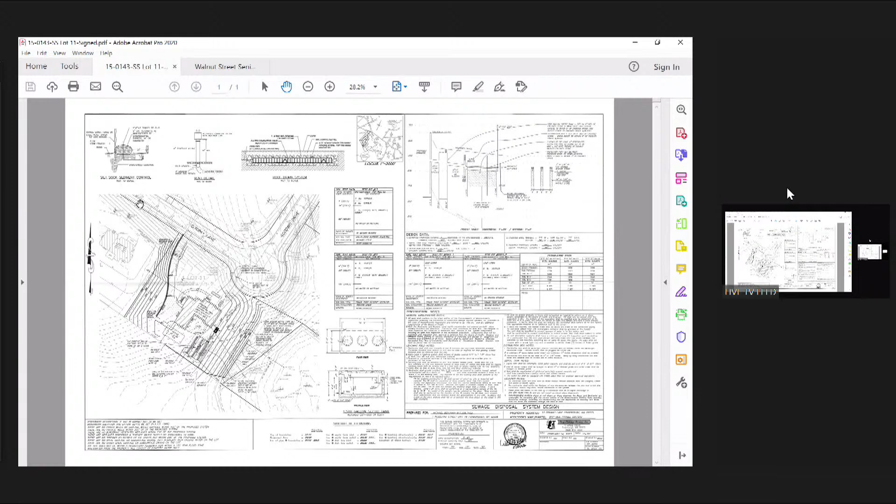So I've put the plan up on the board. I know every one of you has a copy of the drawing, and I'll just give you a quick orientation. So this lot is located on Conway Lane, so if you were coming up the completed portion of the site, went to the top of the hill and down the hill, this is at the bottom of the hill at the cul-de-sac. And this is Goodwin Drive, which has been completed for about 600 feet or so. So here's Conway coming from the top of the hill, here's the cul-de-sac, and here's Goodwin Drive.

This was part of the Lawson Farm subdivision that was reviewed back in 2016, and the future owner proposes to construct a single-family home on the lot. A portion of the lot lies within a 100-foot buffer zone, and I'm going to have a problem, I'm pretty sure. Oh, here we go, good.

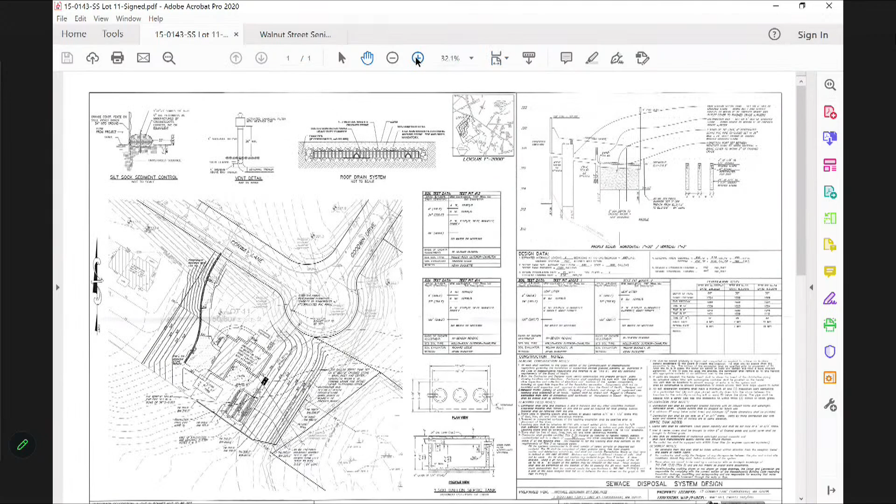Let me zoom in here. I should have colored this up better, but here's the 100-foot buffer zone line right here, so you can see that.

The only work taking place is some grading down here and a portion of a wall, which is up to 6 feet at its highest point. It's basically just holding back the slope in order to eliminate any more grading within the buffer zone. There's already some erosion control fencing down there.

It'll be expanded for this project. At its closest point, the wall is about 88 feet, or the limit of clearing, the limit of work will be about 88 feet from the BVW, down in this area. It's about a total of 1,275 square feet of alteration.

All of it will consist of the landscaping, which is the wall. At this point, I think what we're going to be using is a riprap stone slope there, because they've already started building that, and they plan to continue using it.

As we've talked about previously, this is a path that comes in from Lakeview Road, and it will run through the land that's going to be conveyed to the Conservation Commission eventually. This lot itself has two fence posts that will be placed, one here and one here, where the path is closest to the property.

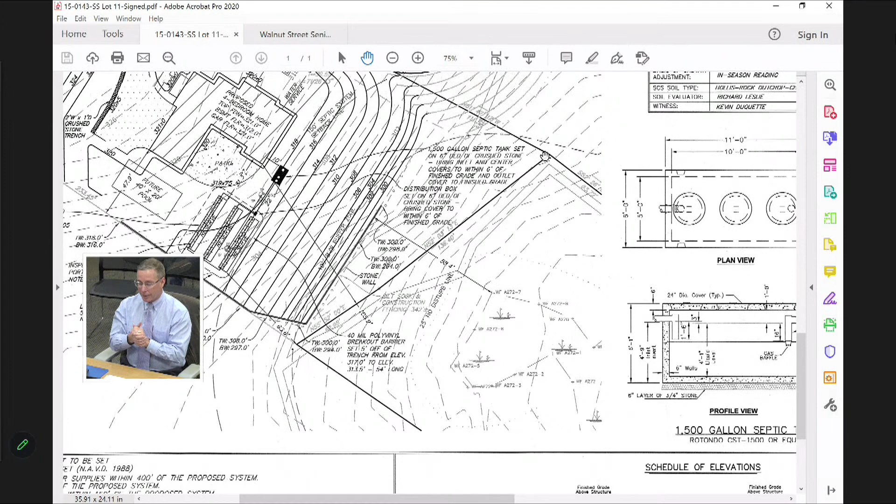Those posts are 6x6 posts. They'll stick about 4 feet out of the ground and have a tag saying conservation property. This was approved during the initial design—it isn't part of this design, but I wanted to show you where it lies. The septic system is more than 150 feet away from any of the wetlands, which is in compliance with the Board of Health regulations and the local Conservation Commission bylaw.

At its closest point, the house is about 165 feet from the BVW. I think this would be an appropriate one for a request for determination because of the very limited amount of work taking place within the buffer zone, and because at its closest point we're about 88 feet away from the closest wetland resource area. That concludes my presentation.

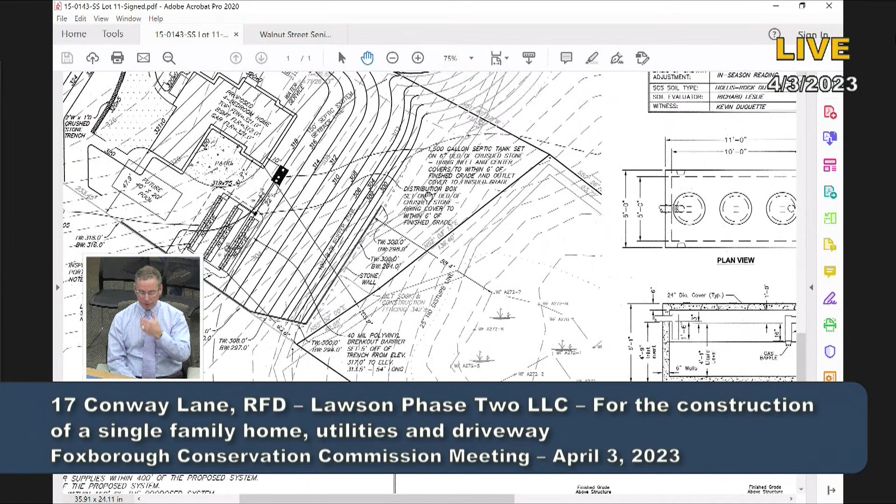Okay, I know Jane has some questions on it, but any questions from the board?

Where's the riprap gonna go? What we were going to do—what they've done now is they have so much stone up there. When they were clearing this lot, they already started building that slope and used riprap on it. So we'll probably continue to use riprap on it, as opposed to taking that all out and putting in grass. So that's gonna be that entire slope—well, I wouldn't say the entire slope, but a decent amount of it, yes.

Probably not near the top, because Joe Homeowner wants some lawn—he's not gonna be interested in looking at that. But down below, I think, would be the area where it would remain. It's gonna be a steep lawn. Yeah, that's a tough area.

This was the house, though—he wanted a flat backyard on the side of the hill. Good for sledding.

When you actually walk that now, the construction fence is up and the silt tubes are in, but are they in the buffer zone? Because based on your plan here and walking it, it appears that they've already done this work.

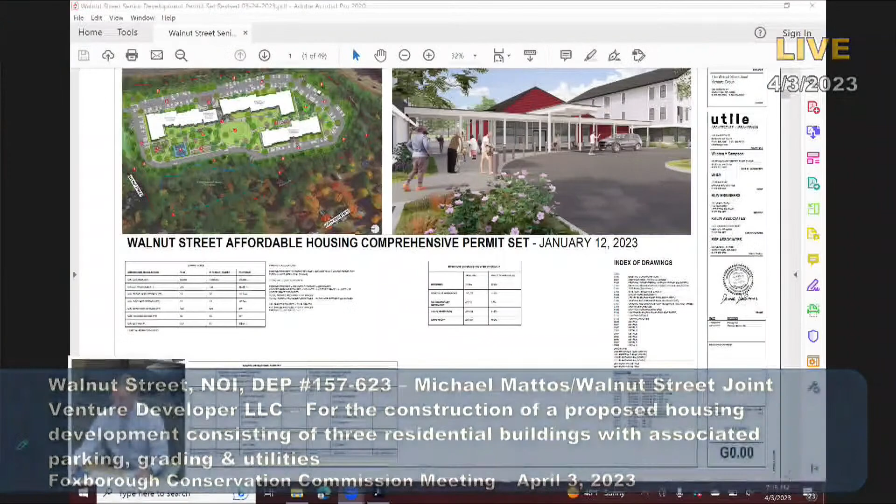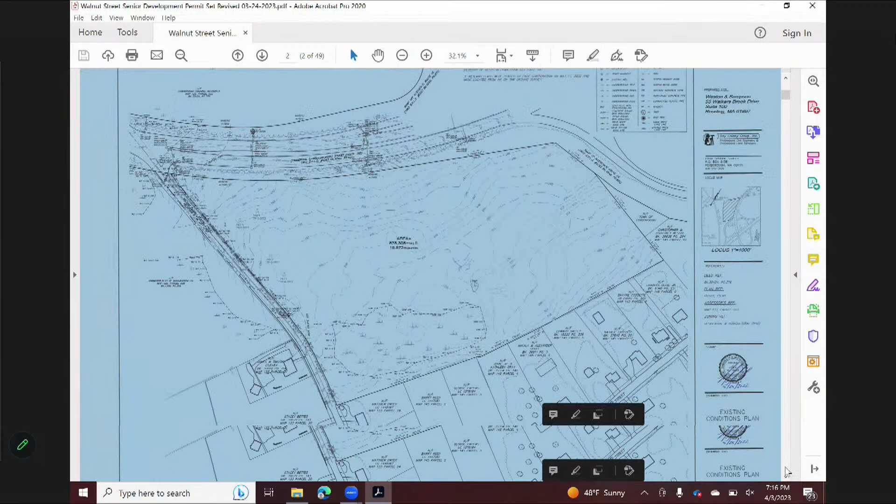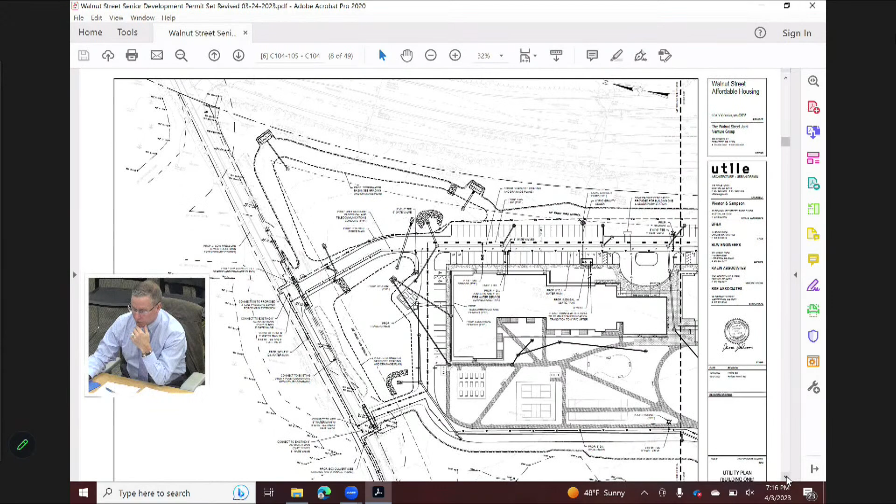And as we stated before, the fact is that wetland is actually above us, it's flowing toward us. So that was one of the things. If you go back to sheet C106, that's your stormwater sheet.

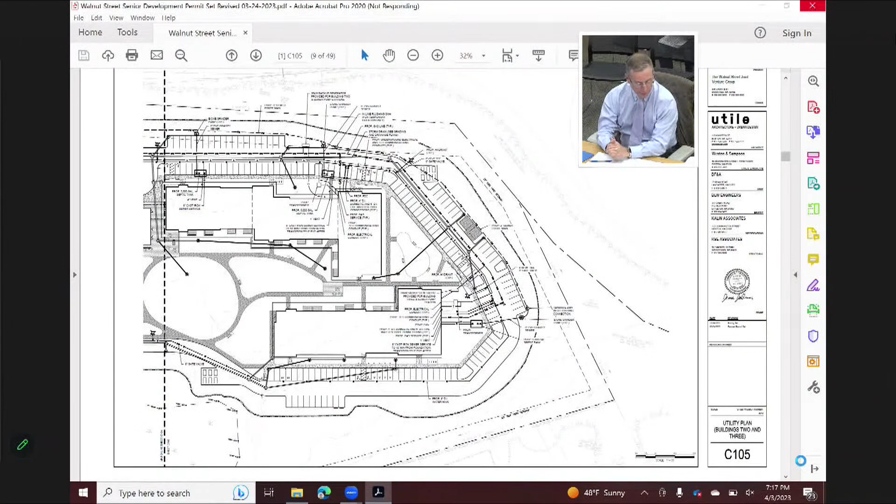That shows where Jesse talked about at the last meeting, the fact that the water department asked us to connect the water lines between the two driveways. So, well, not just connected, we're replacing the existing line.

So if you look on that plan set, on Walnut Street, you can see that we've added, if you look between the two driveways, you'll see the line on the other side of the street, which shows how the new water line would be laid. And again, that's all within the pavement.

And then finally, on the same sheet, I'm sorry, that was C104, but you can still see it on 105. But if you look on 104, and then go back to 105, on our side of the road, there's a big ditch, if anybody's been out there.

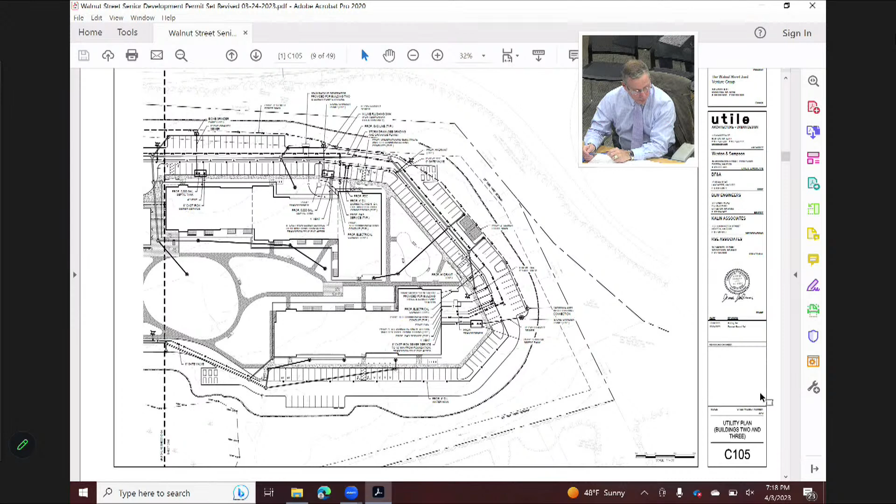And what we initially showed was piping through there. Going back and looking at it, it's not going to really handle it. So what we're proposing is we replace the piping with a box culvert, so it's a 3-foot span, 1-foot rise, and it's under both entrances. The emergency entrance, which is more toward North High Street, and the main entrance, which is closer to 140. Again, that's all on our side of the street, but some of it is within the buffer zone.

So those were the changes that were made. And we'll open any questions.

Jane, I know you did a site visit. I did, and I went right at the height of vernal pool season. I'm pleased to announce there were no chorusing wood frogs, and there was very little water, actually.

I don't understand what you mean all the water goes down towards the front, because it looked pretty darn flat to me right there. But besides that, the particular area where they're going to get it closer, it was a conservative delineation, so I don't think it's going to make a significant difference. But I would like you all to make a finding about that before it's closed.

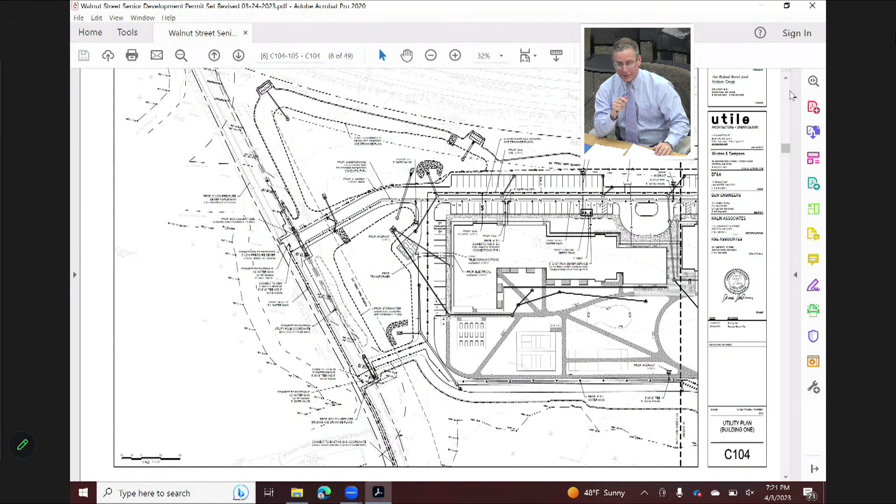And that's on sheet C500. If you take a look, the lower right corner - it's not a hay bale, this thing's listed as a compost filter tube. That information is usually included in an attachment, attachment A, with details like that.

All right, any other questions? Because of our experience in the past, he just said that they're gonna put the fencing up and the filter tubes, but usually you mark it out with flagging and then they clear it because it's so hard to move those tubes. So who's right? Well, isn't construction fencing first, probably tubes after it's been cleared?

Typically, what I write, and I'm sure it's the same thing you just said, Mr. Packer, is the surveyors would mark it out, you go in and clear the trees. Not necessarily, we don't stump it at that point. Then we go back in and put the erosion control fencing in, because now we can move around, and then we stump it. So the only disturbance you'll see is with the big rubber tire machines going through to snip the trees and pull them out, to skid them out, and then they'll come in, lay the erosion control fencing, and then they'll pull the stumps. So there won't be any erosion until the stumps get pulled - that's when it starts to get ugly. So that would be the sequence.

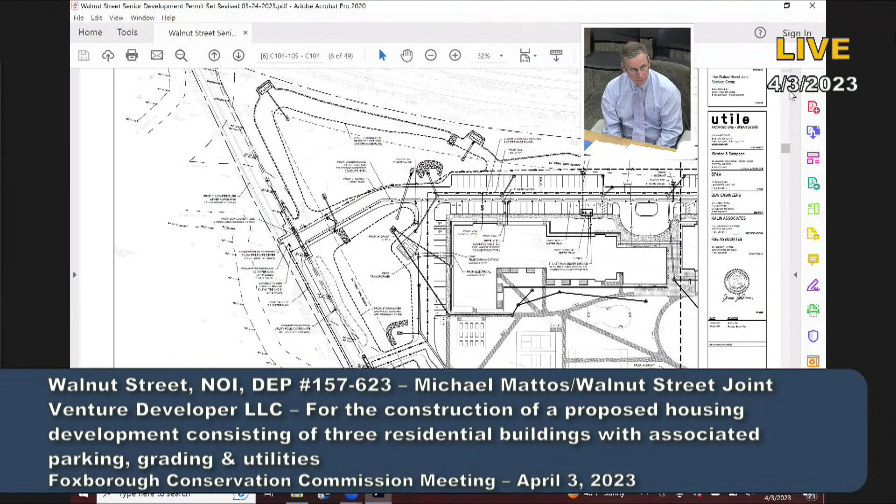I'm not sure if it's written somewhere, Jesse, in that sequence, but may I suggest that you put additional flagging out so we don't have what's happening elsewhere. Do you think if I put more flags out, that would have helped? They might notice. What about construction fencing first? I mean, that can't be too difficult. No, it is - imagine carrying those rolls in the woods.

So, I mean, you're just jaded right now because of what just happened. But you look on the rest of that site that we just were at, it was done correctly - you just can't outlaw stupid, that's what happens. But we try to make sure the guy can see between flags.

Do we have any questions from the audience? Nope, okay.

Close it? I don't see why not. The only thing is I came down late because I tried to get the order out completely, but I did the signature page, and of course I left it upstairs, so I'll run up and get it right now.

As far as if you do close it, the finding I was recommending is the 10 feet, due to the fact that it's not a vernal pool, as observed elsewhere, because the last few 40Bs had a certified vernal pool, so they were kind enough to give us that 25-foot. With this, it's like 10 feet at the closest, but it's not a vernal pool, so that presumption's been overcome.